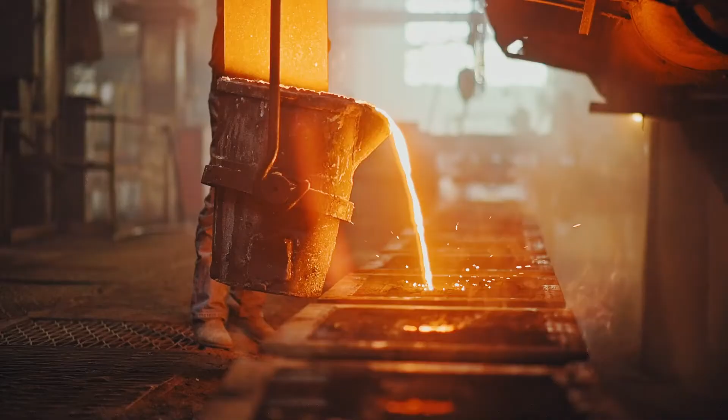The Ruhr region, the cradle of the mining and steel industry and home to many companies who've made industrial history, such as Köppern Machinery Manufacturers.

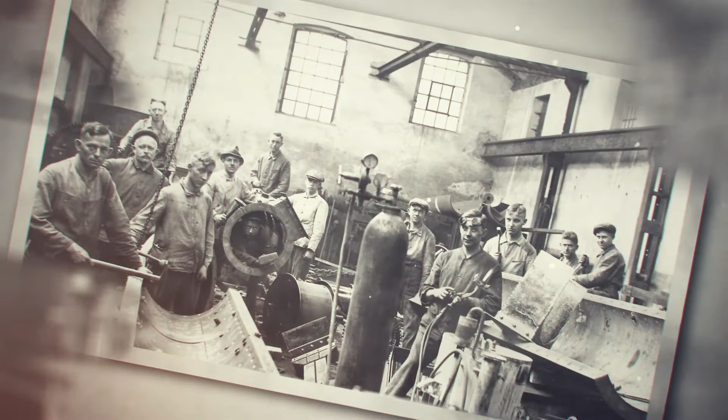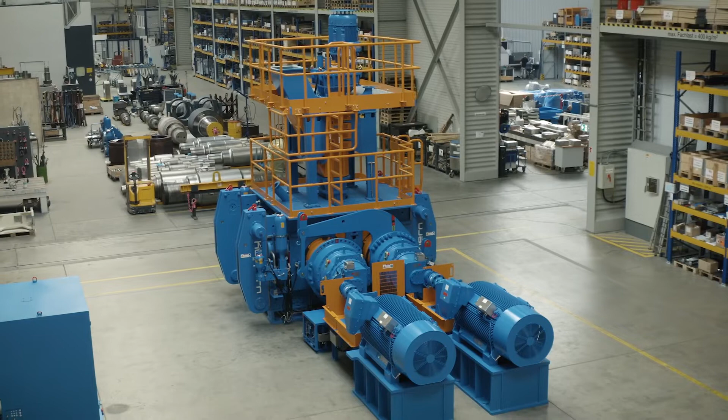The history of the manufacturer began over 120 years ago in Hattingen with Wilhelm Köppern, a brave entrepreneur and technical visionary who transformed a small steelworks into a major producer of roller presses. It all started in 1898 when my great-grandfather acquired an existing company here in Hattingen, the so-called Berninghaushütte. It was a foundry, but with the acquisition of that company, he immediately turned it into a machine manufacturing and producing company.

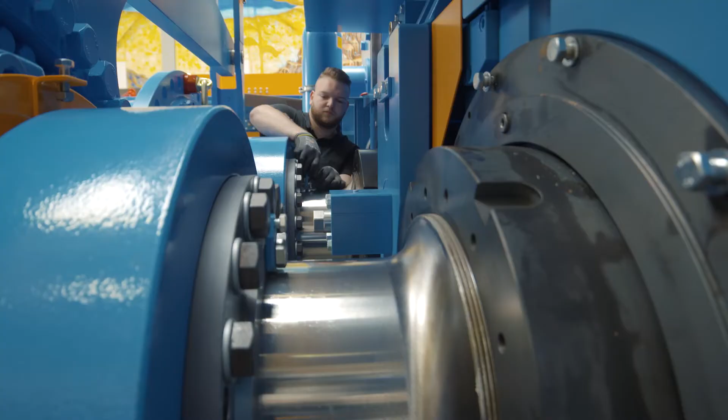Köppern's business today is the production of state-of-the-art roller presses and roller mills. It is one of the world's leading producers in the fields of comminution, compaction, and briquetting.

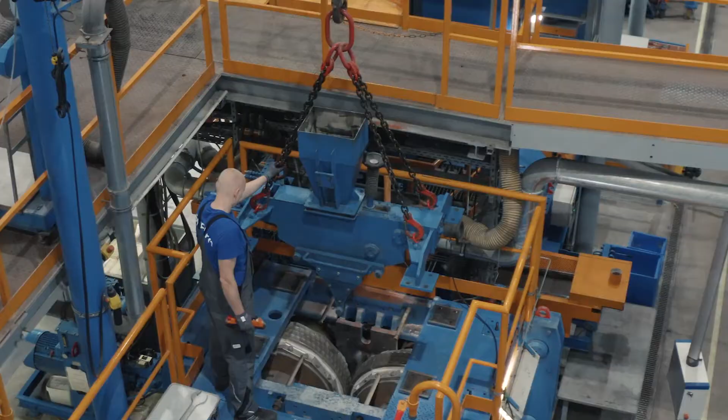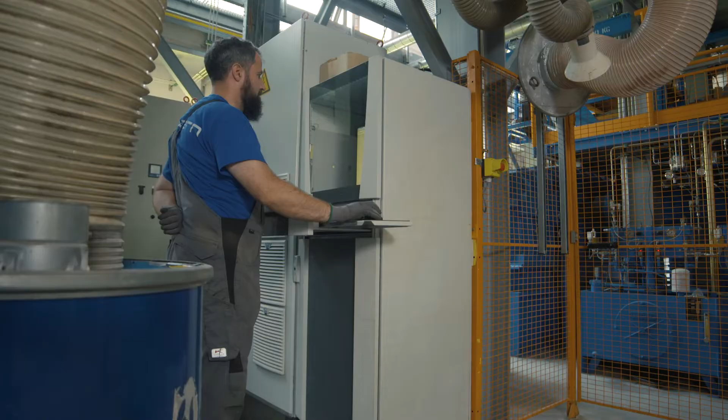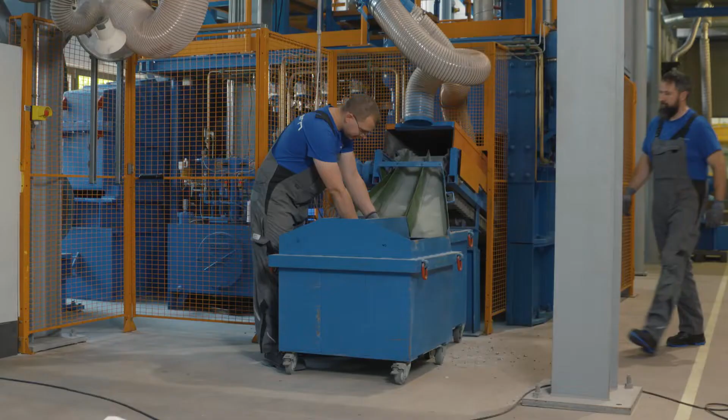In order to determine the perfect solution for its customers, Köppern has its own industrial-scale testing facility. This is where the delivered material is tested and analyzed. First of all, the customer is asking for a certain throughput, tons per hour or tons per year. Together with the raw material from the customer, we go to our test center in Freiberg, and there we find out the necessary pressing forces, and together with the working width, which defines the throughput, we define and design the machine.

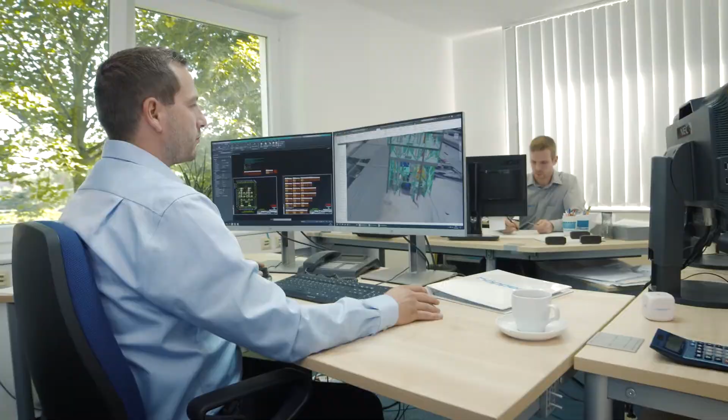Once the type of machine and the process technology have been defined, the planning phase begins, where engineers and product designers develop a product based on the customer's requirements.

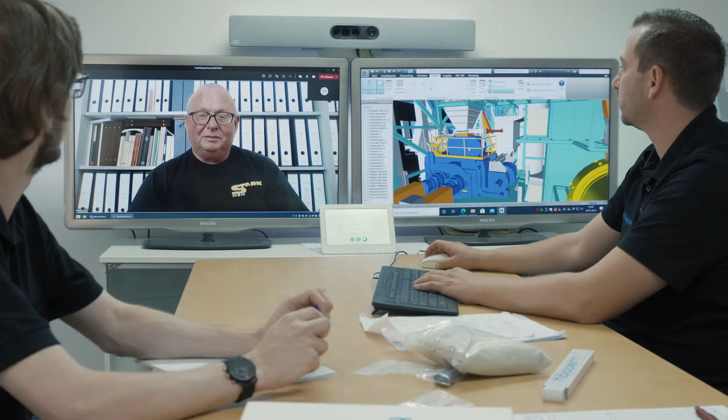Apart from the service of the machines in the field, we also offer the design and engineering for whole plants. This is especially necessary in the grinding field and also in fertilizer. Here we do the engineering of the whole plants, and they can be of reasonable size.

Once the planning is complete, the next step is to assemble all the parts needed to build and develop the machine.

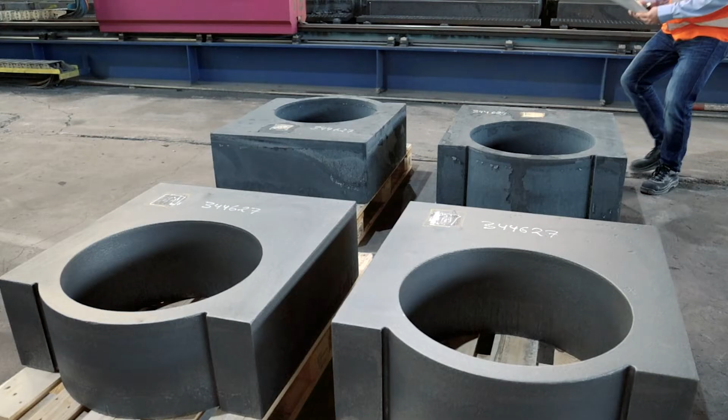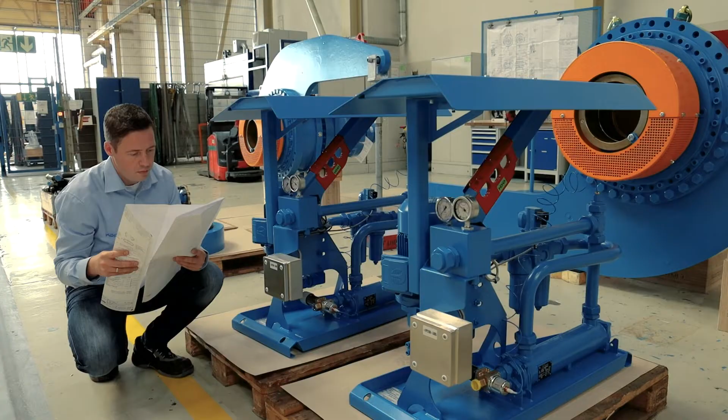To ensure the highest possible quality for the individual products, Köppern works with industrial service providers who all meet the Made in Germany quality standard. In addition, many parts that are later installed in the roller presses and roller mills are manufactured in-house.

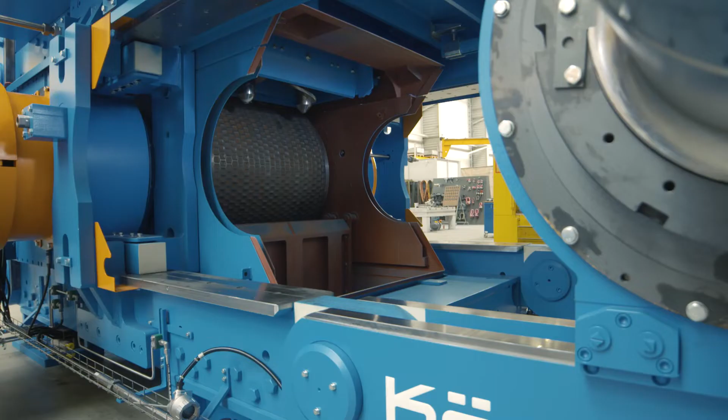The machine you can see in the background is for a customer who bought the first two machines from Köppern in the early 1970s. At the beginning of 2000, he doubled his capacity and bought another two machines. And now, 50 years later after the first two machines, these new machines will replace the original ones.

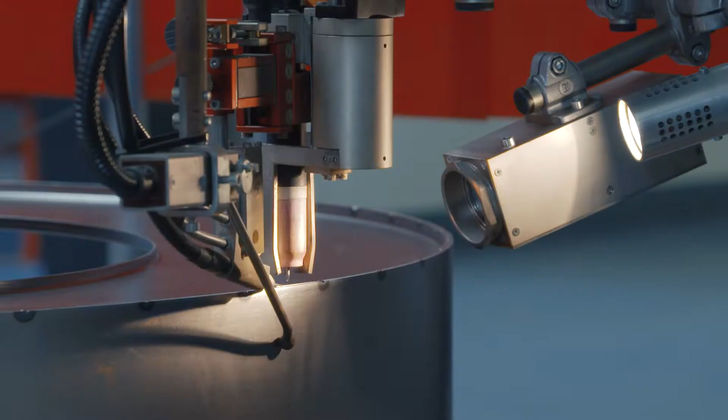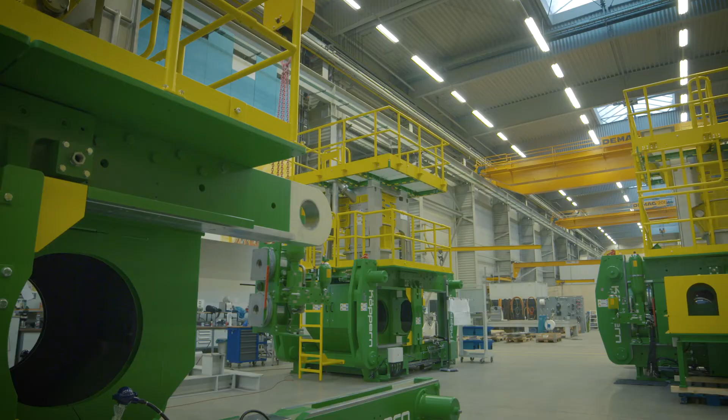Roller presses or roller mills are manufactured at Köppern with a high level of in-house production. Many production steps run in parallel in the large factory halls so that manufacturing and assembly can produce effectively and just in time.

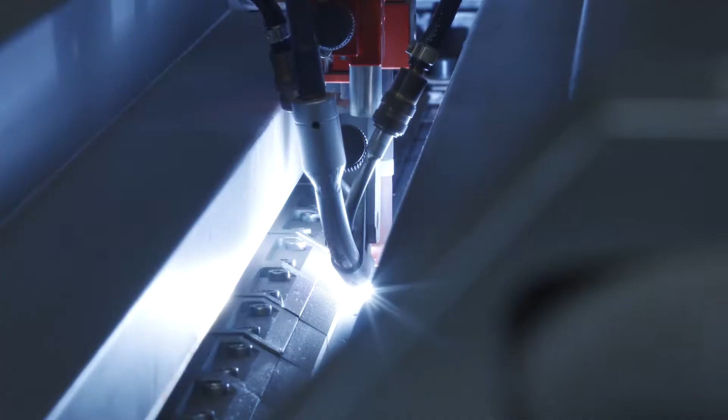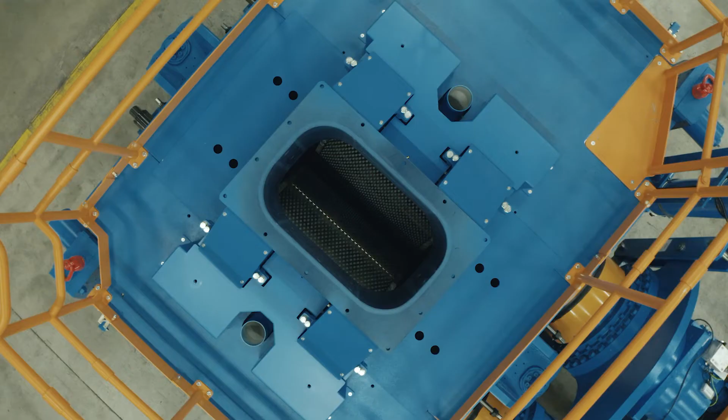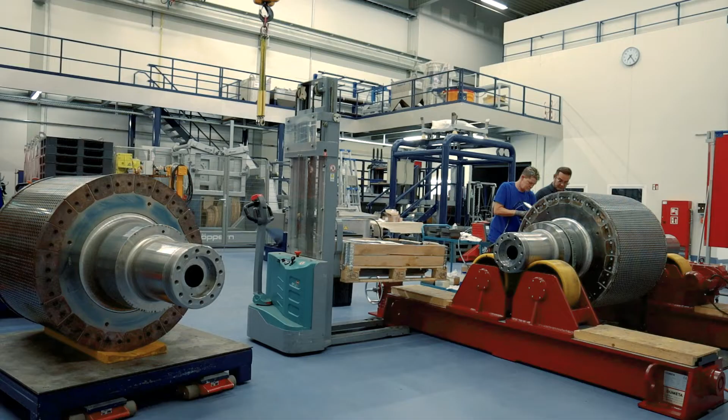State-of-the-art machines and the latest technology with innovative ideas. Important in our field is especially wear protection. Here we do high-class and very advanced powder metallurgical production of our own surfaces in order to reach the highest and best wear protection. We also have very modern machines here in our factory, so we are able to produce all know-how parts in our machines by ourselves.

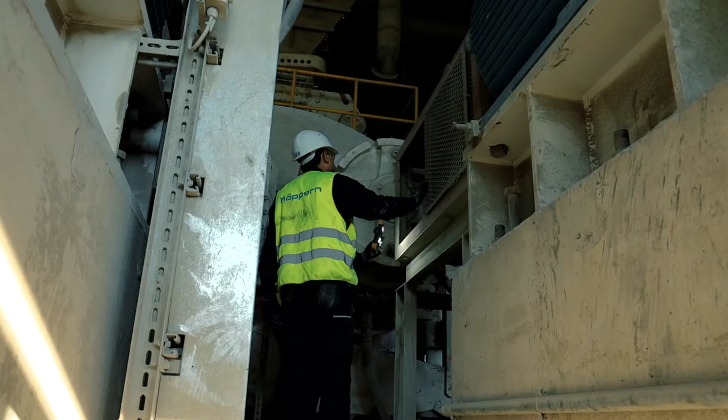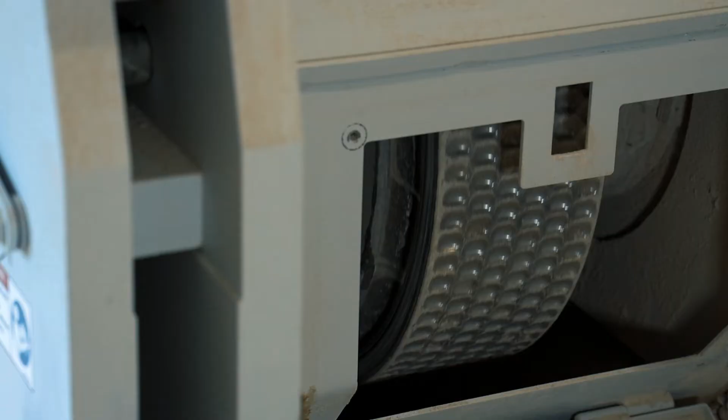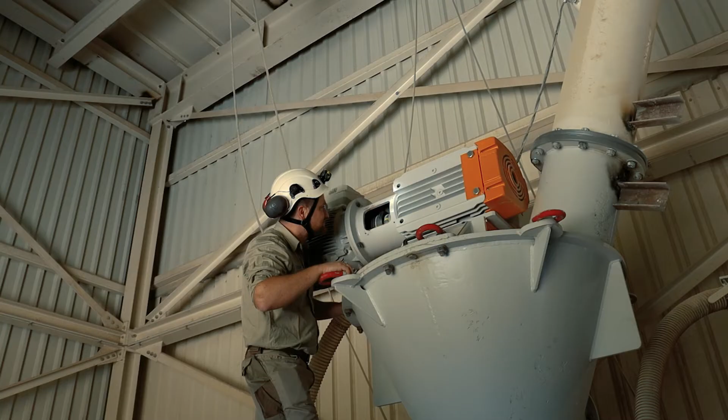Köppern is represented all over the world, with a large network of contacts for sales and services. In addition to the commissioning of complete plants, maintenance and repair are important points in customer care. It's not just a bit and piece of metal we are supplying. We are supplying process know-how, we are supplying support, mechanically and in terms of process, and we are close to the customers.

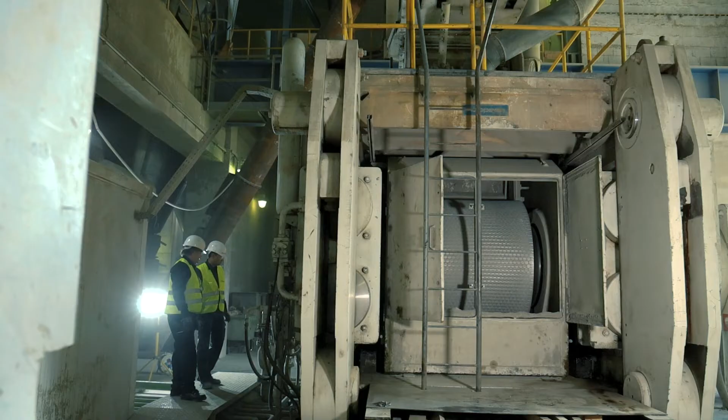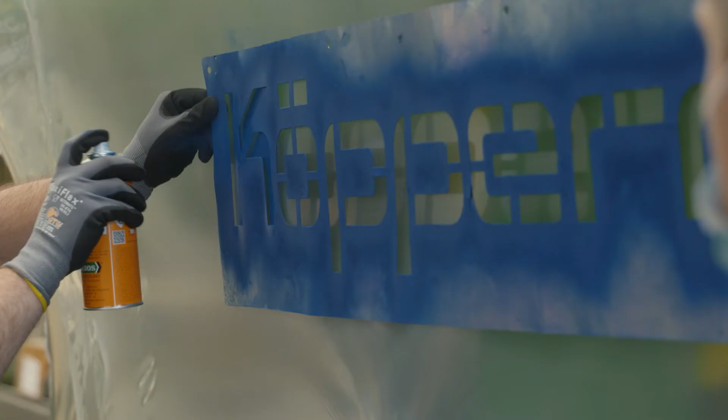We are a traditional German-based company with more than 125 years of experience in our markets, and that's what we are focusing on, to be in long-term partnership with our customers and develop real partnerships from beginning to end. From planning to production, assembly to commissioning, and far beyond, Köppern accompanies its products and also its customers throughout the life of the machine.

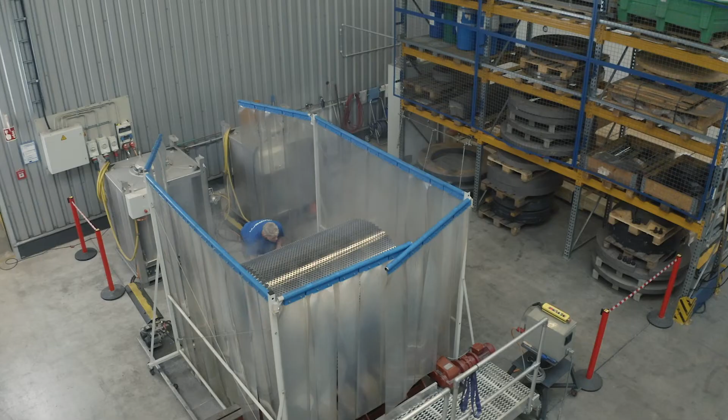One of our key drivers is high technical professionalism and responsibility and reliability, and that's something which Köppern stands for. Of course, most important to the customers, but our responsibility refers also to all our employees, our partners, our sub-suppliers, that they can rely on Köppern as a responsible partner.